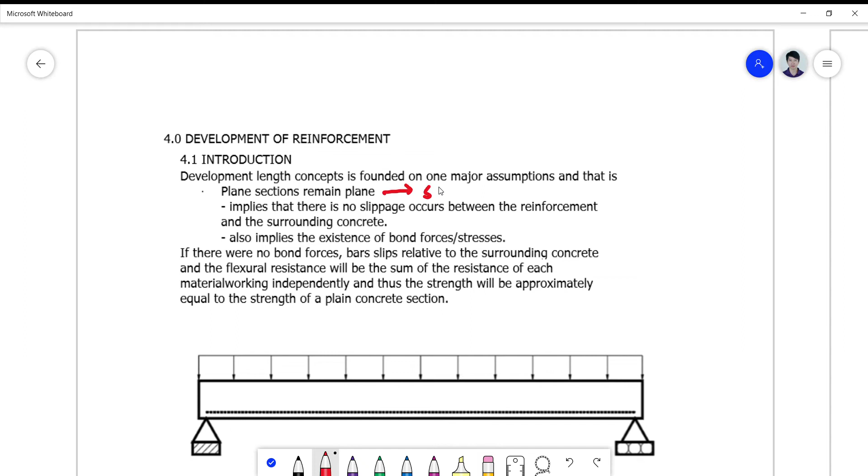So, development of reinforcement, or simply development length concepts, is founded on one major assumption, and that is the compatibility assumption. So this plane section remain plane is actually anchored on strain compatibility.

Compatibility assumption, or which is normally stated in terms of the plane sections remain plane rule. So this implies that within this assumption, there is no slippage occurring between the reinforcement and the surrounding concrete. So if there is a slippage, then this assumption will actually become invalid.

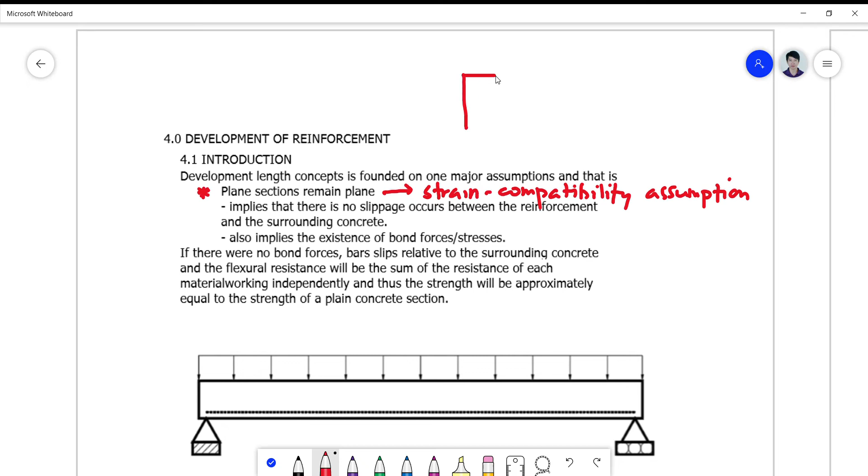Since the linear representation of your strain diagram will no longer be valid. So it means that if there's a steel reinforcement somewhere here at this level, whatever is the stress of the concrete all throughout will demonstrate a linear strain.

Diagram or representation, which is a straight line. Therefore, it's a plane representation. So this becomes now a straight line, and this is also straight line.

So before the deformation had happened, and after the deformation had happened. So this is now a linear strain distribution diagram that is simply stated in terms of the plane sections remain plane, and is most popularly known as the strain compatibility assumption.

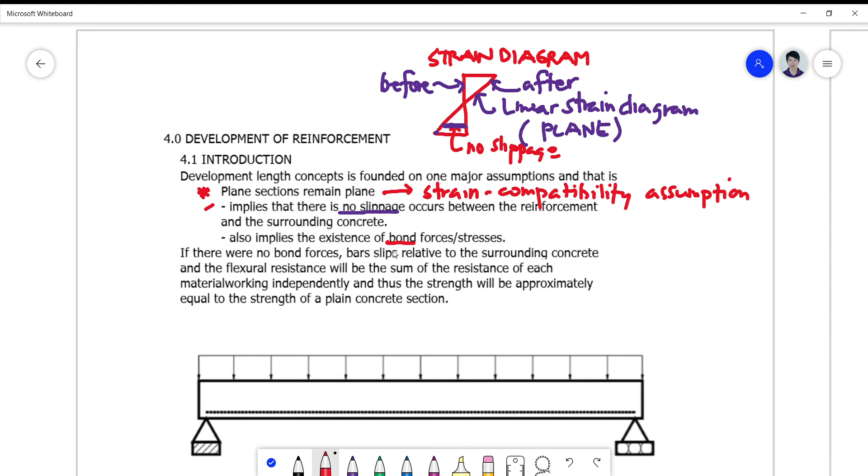And also, it implies that there must be some forces which are called the bond forces that exist between the reinforcement and the surrounding concrete, for this implication again to be valid.

So if there were no bond forces, the bars will simply slide or slip relative to the surrounding concrete, and the flexural resistance will simply be the sum of the resistance of each material working independently, and thus the strength will be approximately equal to the strength of a plain concrete section. So this is now the conclusion coming from these assumptions here.

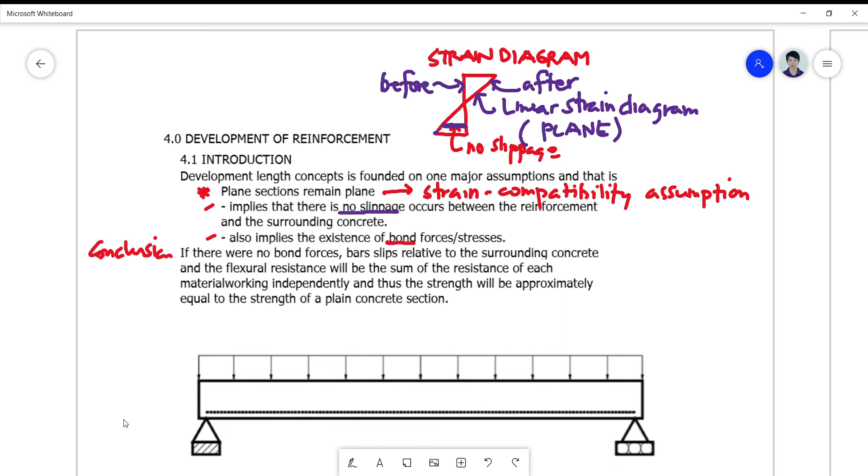Okay, so let's try to understand it by means of illustration. So it simply illustrates to us that when a beam which is reinforced at the tension side, okay, so these are tensile steel, is loaded by a load, a uniformly distributed load, or any type of loading, will actually bend, and therefore this steel here, since the fibers at the bottom, so this is a positive bending.

Will experience tension, and the fibers at the top will experience compression. So the tendency for this steel is to stretch and elongate, and that would only happen if there's no slip, or slippage somewhere along the entire span.

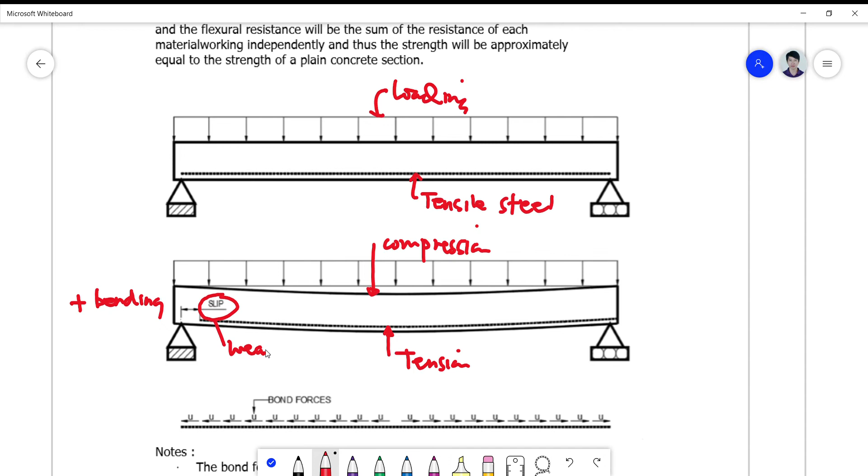And the weakest point at which slippage may happen is at the ends. So if there's a slip here, it means to say that there is no bond between the concrete and the steel, and therefore the plane section remain plane implication will not happen.

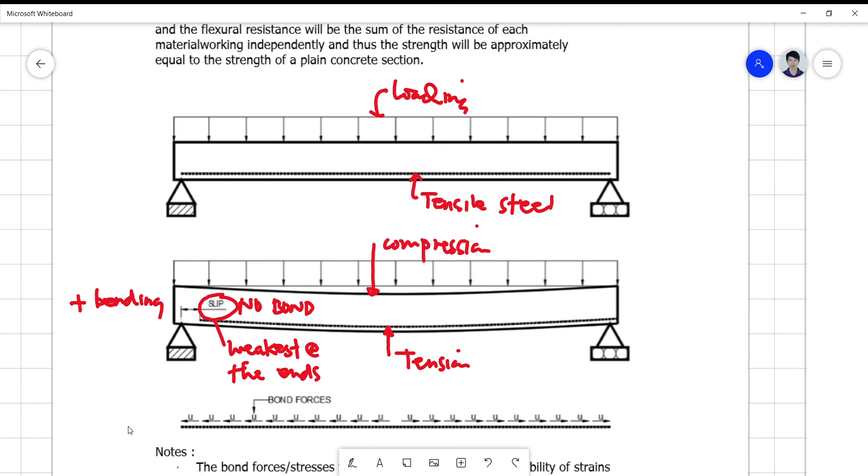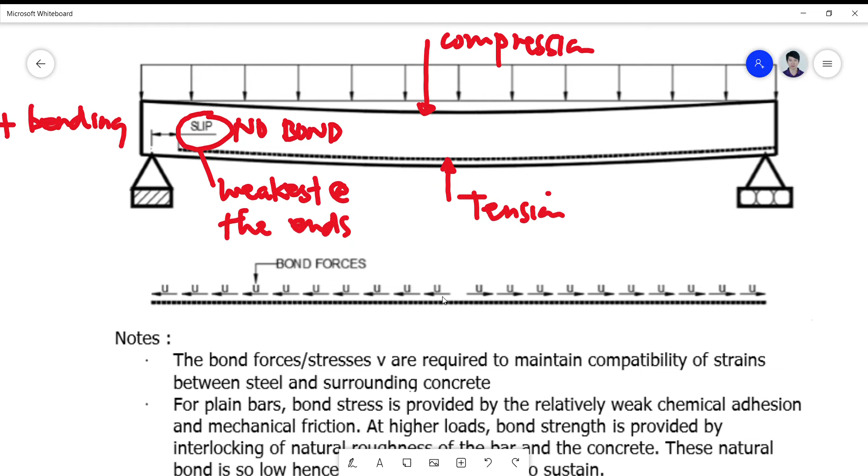But if the bond forces are enough to resist any slippage to occur, then we can say that the strain compatibility relationship is valid. So you can see here now the bond forces represented by a uniform stress all throughout the tension steel, and these bond forces are required to maintain compatibility of strain between the steel and surrounding concrete.

So for plain bars, when you say plain bars, these are smooth, undeformed. The bond stress is provided by a relatively weak chemical adhesion and mechanical friction.

So since it's smooth and undeformed, there is but a very little chemical adhesion and mechanical friction, and therefore the bond stress is very weak, and at higher loads the bond strength is provided by the interlocking of the natural roughness of the bar and the concrete. But since the plain bars have no roughness, then this natural bond is so low, hence it is frequently inadequate to sustain the loads in tension, and therefore failure may arise.

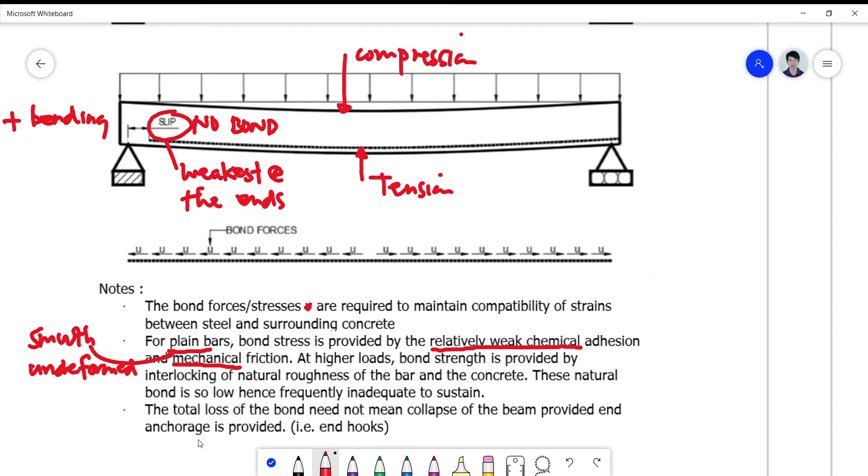Although the provision of end hooks may save the beam from collapsing, you call that anchorage. So this anchorage can help in one way or the other in the prevention of collapse, but again, it is not a good practice to rely on anchorage alone, but rather the bond stress must always be preserved in order for the beam to act efficiently.

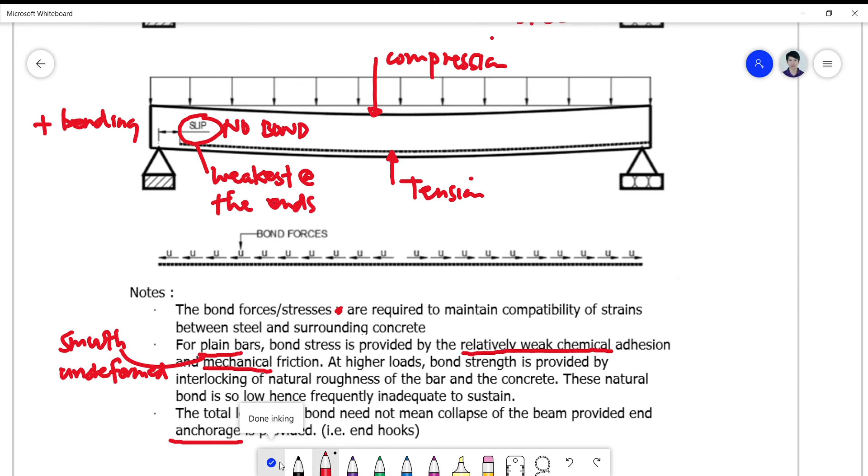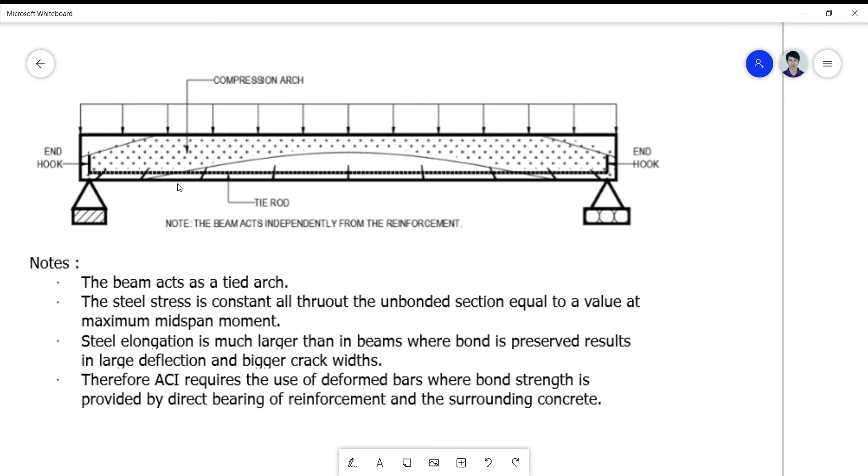So what happens when the bond stress is lost, but there is an end hook? What happens is that your beam will perform just like a tied arch. Okay, look here. So this is now an arch, or a compression arch.

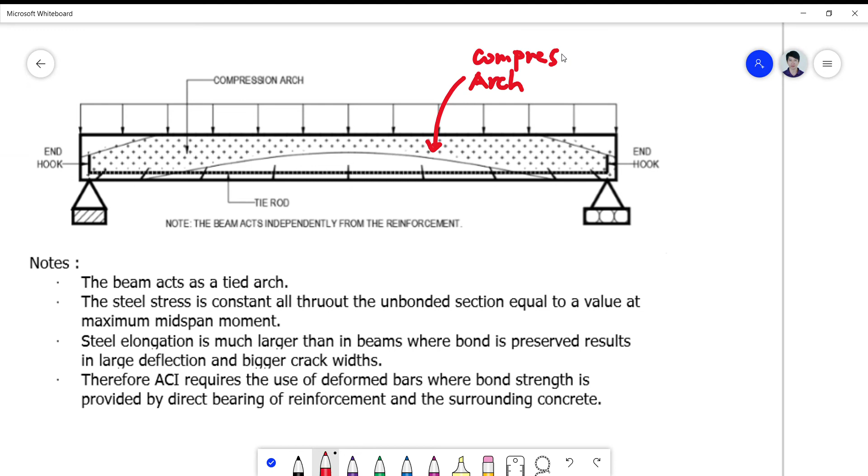And the steel stress is constant all throughout the unbonded section, which is equivalent to the value at the maximum midspan moment. So this will act like a tie rod or a tension rod.

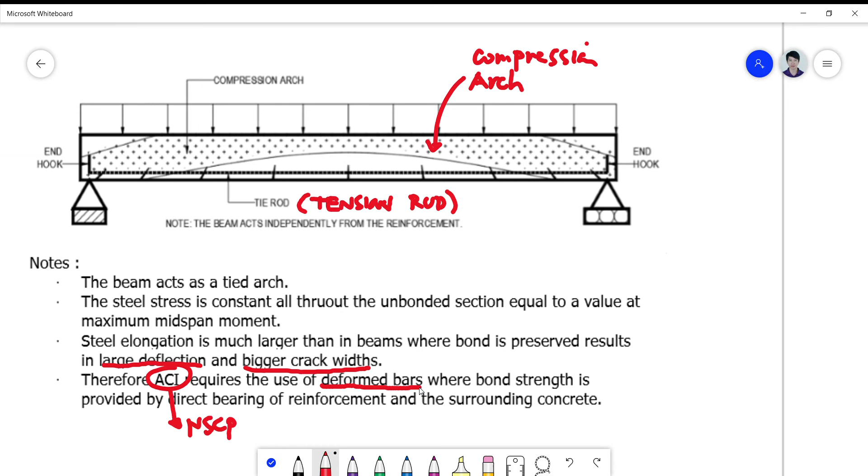So steel elongation is very large compared to beams where bond is preserved, and this will result in a very large deflection and bigger crack widths. Therefore, the American Concrete Institute and the NSCP requires — the basis for NSCP is ACI — so NSCP and ACI require the use of a deformed bar, not plain bars, where the bond strength is provided by direct bearing of the reinforcement and the surrounding concrete.

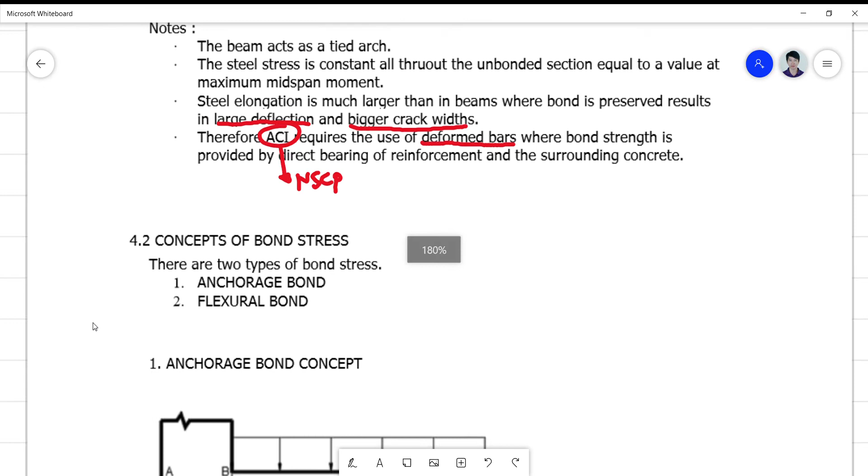So let's move on to some deeper concepts on bond stress. There are two types of bond stress. The first one is the anchorage bond, and the second one is the flexural bond.

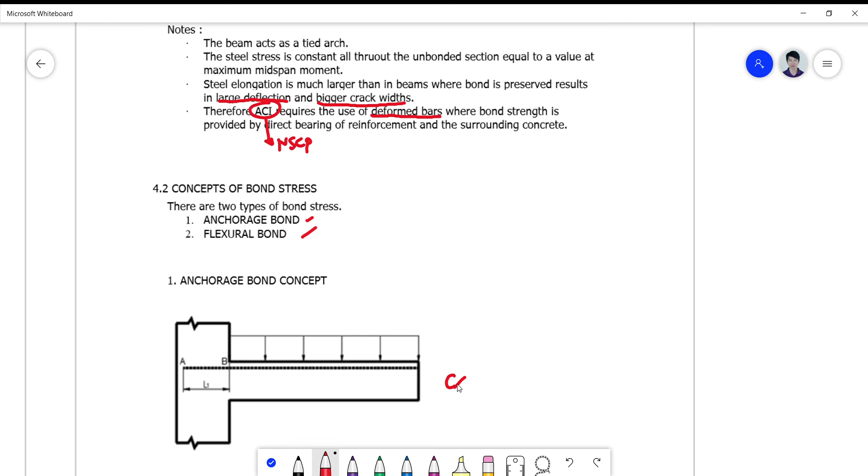So for the anchorage bond concept, we can represent this better by assuming a cantilever beam. So this is now a cantilever beam that is loaded as shown.

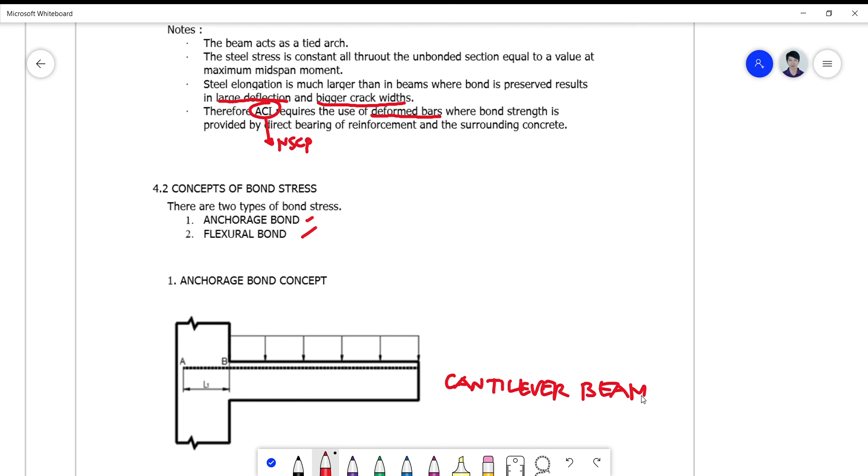Take note that the tension is no longer at the bottom, but since this is negative bending, the tension fibers are on the top, therefore the reinforcement is at the top portion. So this is the tensile reinforcement.

And since this is in tension, the tendency for this portion here, wherein the maximum moment is at the face of the support — so the maximum moment is at the face of support.

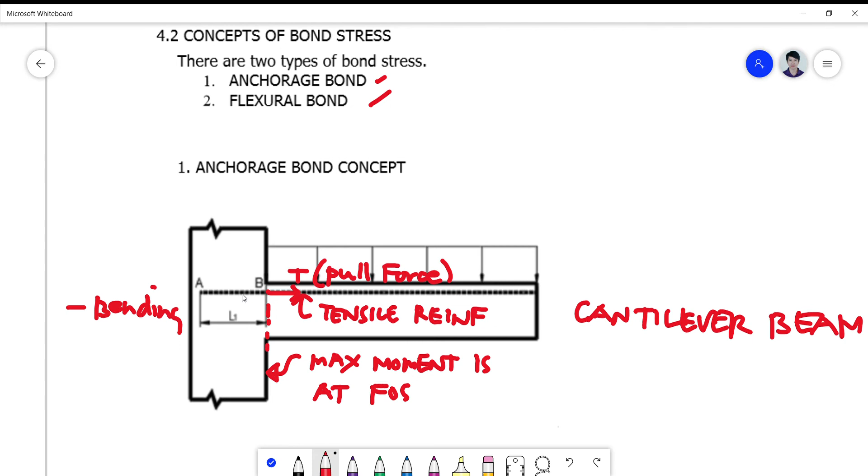Therefore, at this point, there's a very big tensile force T that is pulling this bar from the anchorage. You call this point here now your anchorage zone. So this length here, which is L1, will dictate...

...the strength of the bond. Or simply, we can call it the bond stress. So if this length is long, then the bond stress is great or big. If this length is too small, the bond stress is small.

So what is the length of this L1, from point A to point B, that will be sufficient for this tensile reinforcement not to be pulled out, before it reaches its yield strength, Fy?

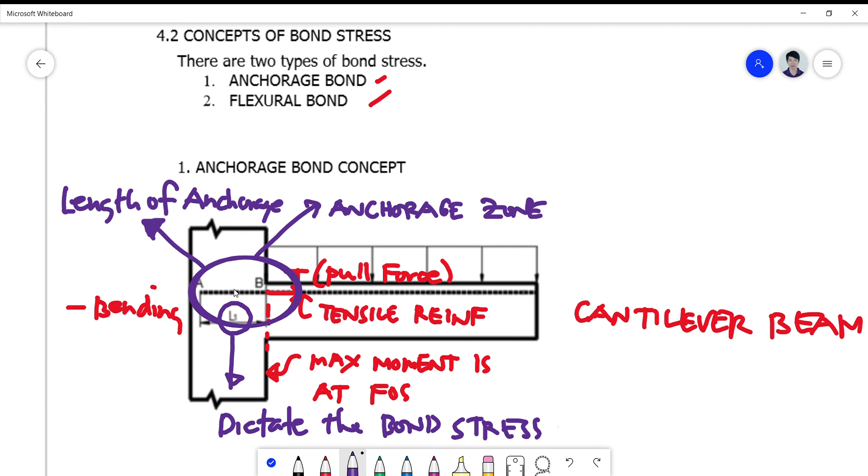Okay, so remember that. So the length of development, or simply what you call the anchorage, is the length in which there will be no pull out or no slip, or slippage if you want, prior to achieving Fy.

Okay, so if you have reached Fy and then it is pulled out, then you can say that the failure is brought about by achieving Fy rather than by losing the bond stress.

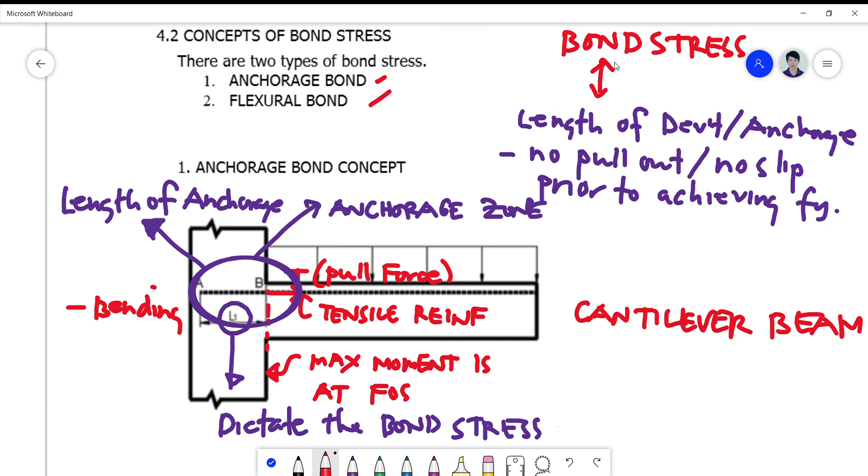So they are just the same, we're just using a different context, and I'll show you why it is better to term it the length of development or anchorage rather than bond stress later.

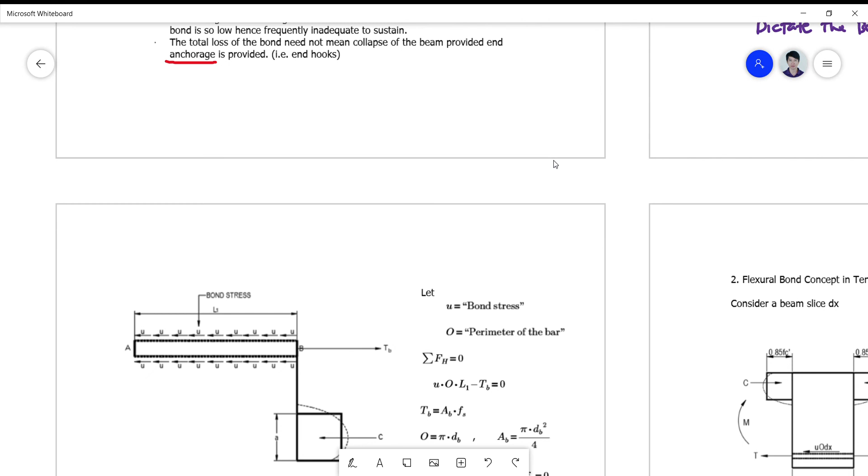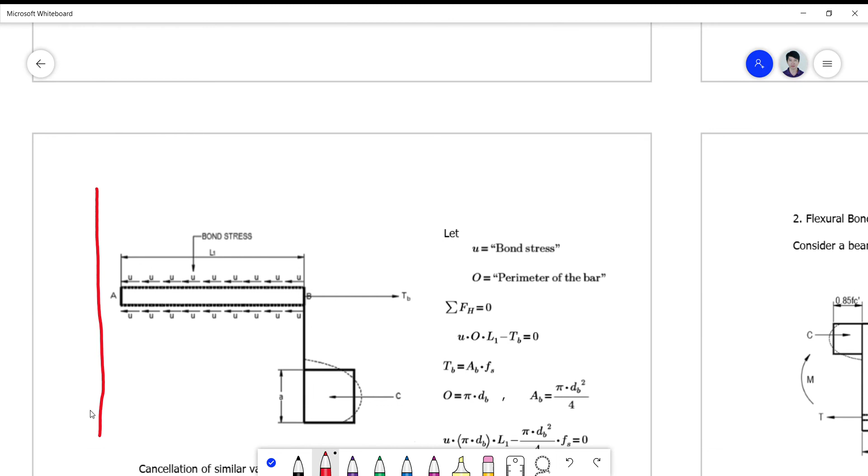Okay, let's take a look at the anchorage zone. So I showed you a while ago that this part here is the anchorage zone. So I told you that, right? The anchorage zone is the point in which from A to B, length L1 is obtained. So this is the length of anchorage, and the bond stress is here. So bond stress and length of anchorage are just the same. Their purpose is to measure the bond stress or the length of anchorage to prevent pullout.

And the pullout is caused by a tensile force TB for a single bar. So we are demonstrating it in terms of a single bar. So how do we do it? We just take note of the summation of forces horizontal equals 0.

If you call your bond stress U, then stress is per unit area. So if I multiply U with the area of one bar, I can equate it to TB here. So if U is equal to the bond stress, and the area surrounding this single bar is simply the perimeter multiplied by the length, then if I get the perimeter like this, the surface area is simply equal to the perimeter multiplied by the length, L1. So this is now the area.

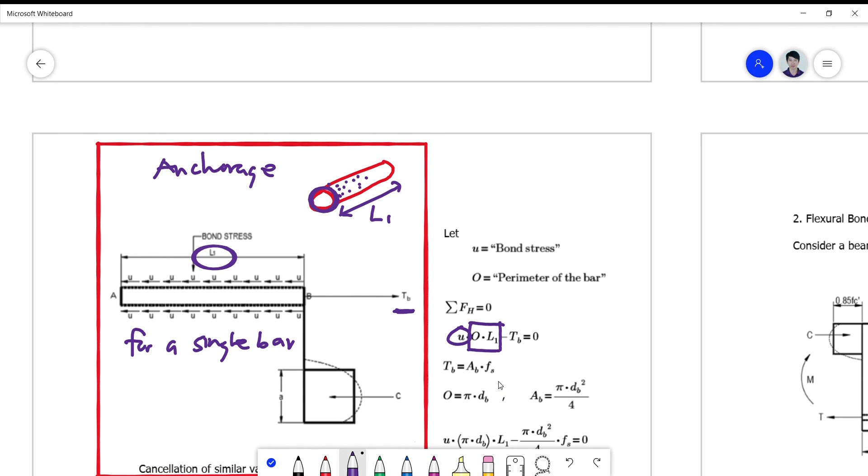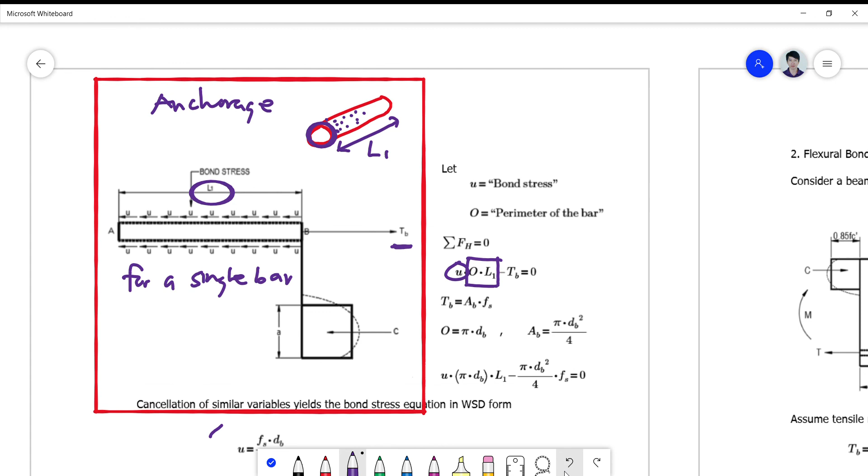But we know that T is equal to ASFS or ABFS, the area of the bar multiplied by the stress in the bar, where AB is the area of a circle defined by the diameter of the bar dB. Therefore, my perimeter is pi dB and my area is pi dB squared over 4. I simply substitute it here. I get this equation, and if I manipulate this equation, I will get my final bond stress formula, which is FSdB over 4L1.

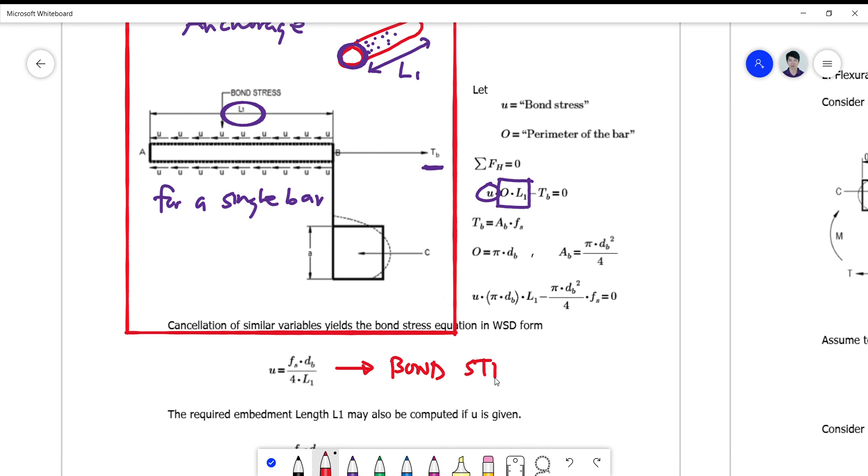Okay, so this is the basic bond stress formula. And the required L1 is simply FSdB over 4U, if I invert this in terms of L1. So this is now the length of anchorage.

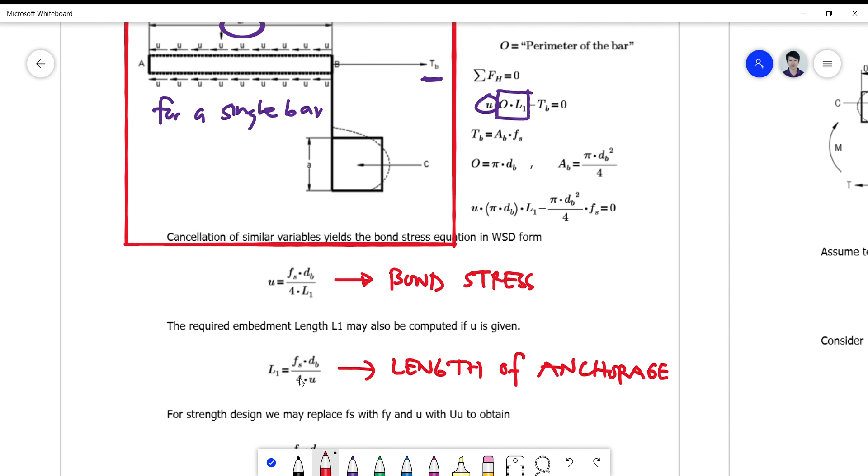And they are just the same. In terms of concept, bond stress or length of anchorage will just give you the amount to be measured in order to see to it that your tensile bar will not experience any pullout. So for strength design, we can replace L1 by LD, Fs by Fy, dB by dB, and U by Uu. So it's just the same, we only represent it in terms of the strength design parameters, where LD is known to be, in general, your length of development, no longer the length of anchorage.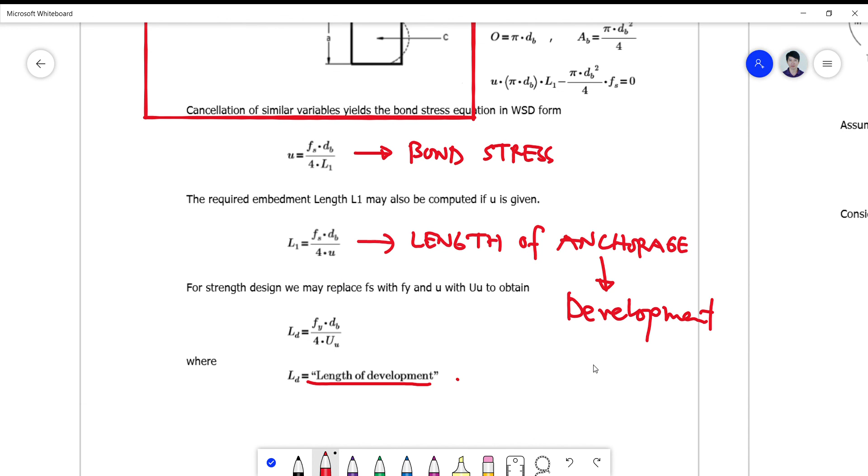Take note that this is now changed from anchorage to the word development. The word development there is to describe your yield strength, Fy, to develop the yield strength Fy. So that is how we derive the concept of the length of development.

The reason why we normally use length of development rather than bond stress is because length of development is easily measured in terms of length, while bond stress cannot be physically seen in terms of stress. It's very difficult to see a stress in terms of a value. But the length, you can see it. If it's 1 meter, it's 1 meter. If it's half a meter, it's half a meter. So that's why it's better to call it the length of development rather than the bond stress notation.

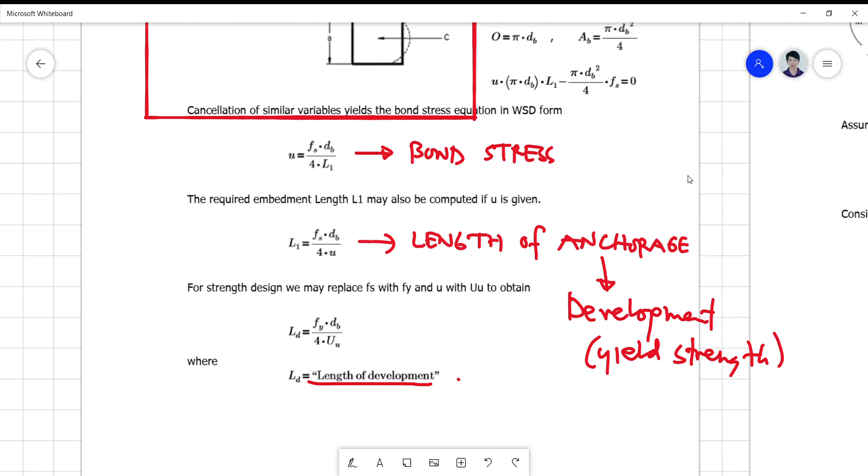But as I've said, you can use the term bond stress if you want. You can use the term length of development if you want. They just mean the same thing. So I'd like to stop at this point to hear some of your concerns if there are any.